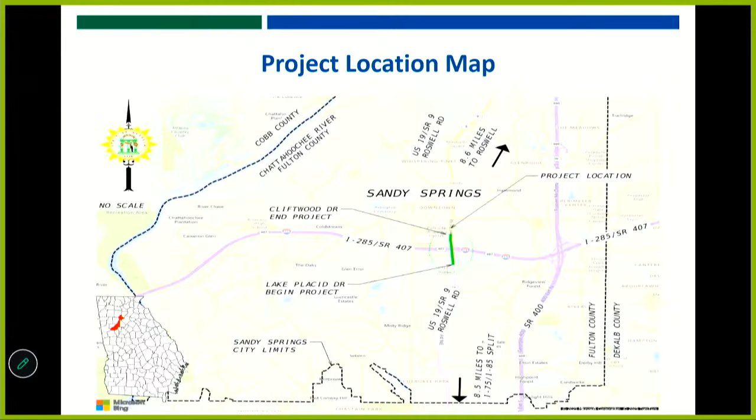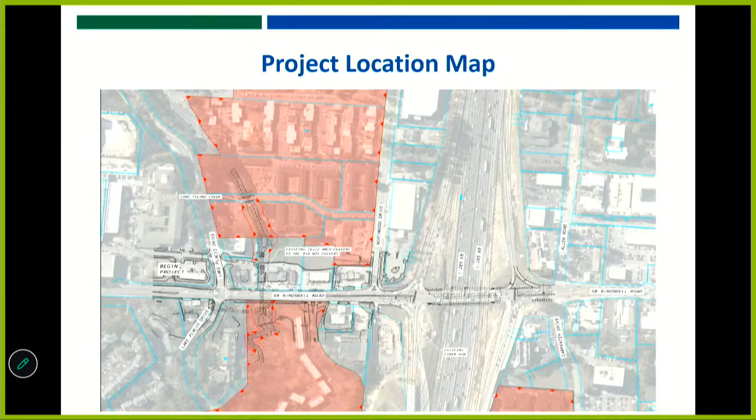First off, we'll go through some existing conditions of Roswell Road and 285 and the surrounding city side streets. Here's a location map, you see it's just west of 400 at 285. A little bit more detail on a location map. The red that you see are previously identified historic districts, environmental resources. Currently, the interchange is a tight urban diamond, or a TUDI.

If you hear me say TUDI, I'm speaking to the existing interchange configuration. 285 in the area has got 10 lanes. There's barrier-separated collector distributors along 285. Roswell Road is 4-lane, it's median divided, it's a principal arterial, carries approximately 40,000 vehicles a day through the interchange. Lane widths on Roswell Road currently vary from 10 to 11 feet. The border width or shoulder varies from 10 to 16 feet and includes 4 to approximately 9-foot sidewalks, side paths.

285 through here has a variable speed limit. The 65 miles per hour is used for the design of the initial ramp curve. I have it right here. The Roswell Road speed limit is 35 miles per hour. Existing right-of-way along Roswell Road varies from about 60 to 220 feet. I do want to point out that that 220 feet is up at 285. That's your widest right-of-way due to 285's right-of-way in the area.

The project is mixed-use residential and commercial. The ramps off of 285 are 2 to 4 lanes currently, 12-foot wide lanes, and the ramp shoulders vary from 8 to 12 feet. Our local roads include, but are not limited to, Lake Placid Drive, Northwoods Drive, Allen Road, Carpenter Drive, and Cliffwood Drive. All of these city streets within the limits range from 2 to 4 travel lanes with widths varying from 10 to 11 feet. They all maintain a variable border width, 10 to 16 feet, and the sidewalks and shoulders range from 4 to 10 feet in width.

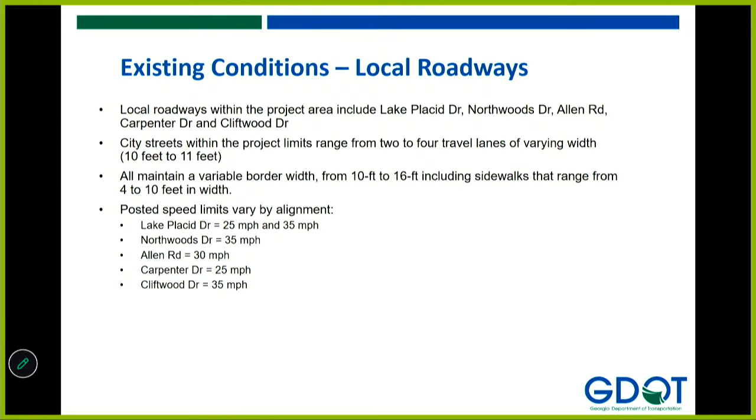You can see that our posted speed limits vary depending on which side street you're on. We have a lot of previously identified historic resources, and we saw that on my location map with the red boxes indicating history. We have at least one stream in the area. Allen Park is located nearby, it is not within the project limit, but it is close.

There will be ongoing coordination with the 285 express lanes for noise mitigation. I don't want to keep going, y'all can't see it, let's see. And there's still ecological resource surveys that need to be completed for this particular project.

Now the fun part, the alternatives we've considered. Our first alternative, alternative one, was a displaced left. It was not chosen as the preferred alternative in part due to benefit cost, and it not fitting with what you see in the blue there, which is a footprint that Gresham was provided for the future express lanes. Our displaced left just was not going to size to fit vertically nor horizontally with those Top End express lanes. So that was a parameter that we had to take into account on every alternative that we explored.

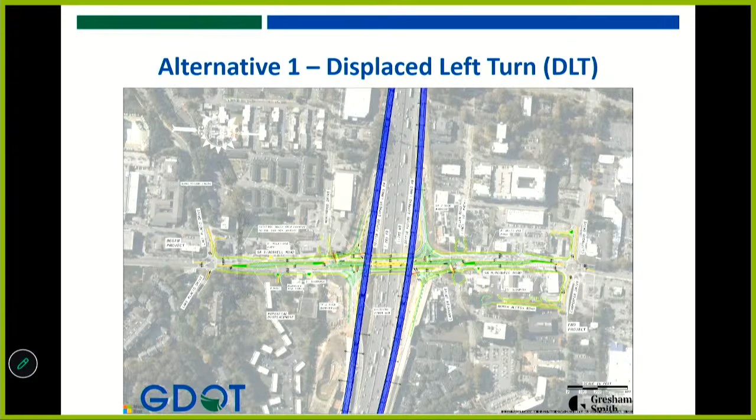The next alternative, alternative 2, when it pops back up, is a single point, or a SPUI. Same reasons alternative 1 wasn't chosen: very low benefit cost and does not fit well or at all in this case with our Top End express lane parameter.

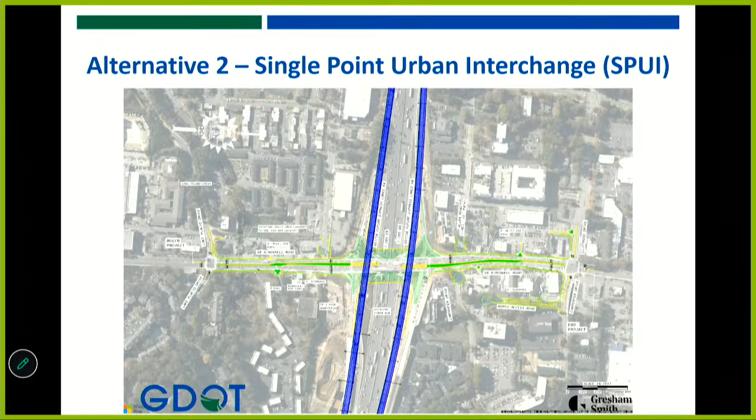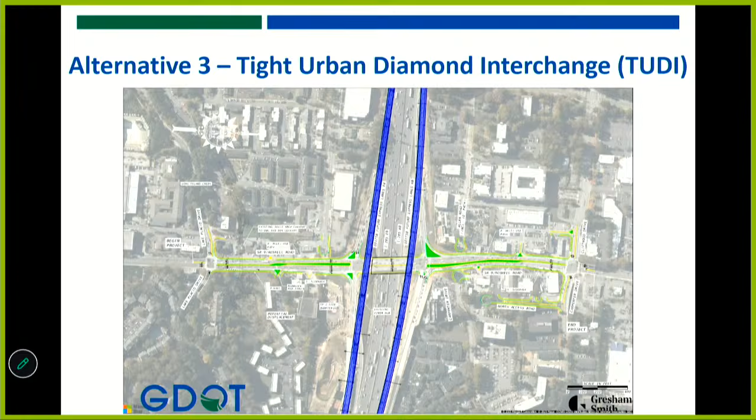Alternative 3 was taking the existing TUDI or tight urban diamond and adding capacity in the form of left turn lanes onto and off of the ramps, increasing level of service and operations with the existing configuration. The bridge would be replaced in this instance. This also wasn't chosen due to a lower benefit cost ratio. It does fit within the current footprint we were provided for the express lanes, but with a lower benefit cost, it was not the preferred alternative in this study.

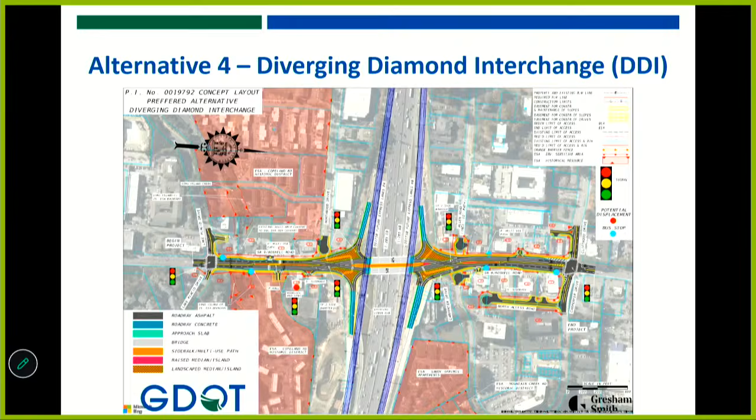Alternative 4, which is our preferred alternative, is a DDI, or diverging diamond interchange. This provided the highest benefit cost and fit well within the express lane footprint. Here's our preferred alternative. Go to the next one.

Total project cost for the preferred alternative, the DDI, is estimated anywhere from $70 to $85 million. As mentioned in the beginning, the only thing funded here is the scoping phase—right-of-way, utility, construction, and PE, or preliminary engineering, are not currently funded.

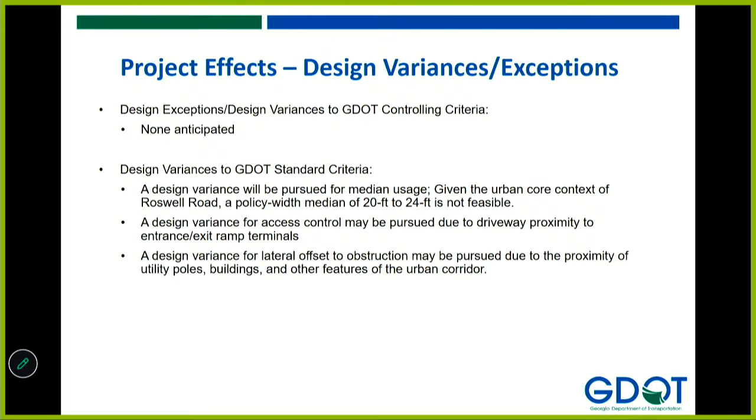We have potential effects and other highlights we'd like to point out. We are not anticipating any controlling criteria exceptions or variances. We are anticipating at least 3 variances to GDOT standard criteria at this time: median usage, since we won't be able to fit a 20 to 24 foot wide median as policy calls for through here; access control, which may need a variance due to proximity of driveways to our ramps; and a design variance for lateral offset to obstruction, which may need to be pursued due to the proximity of poles, buildings, and other features inherent to an urban corridor.

There are currently 23 anticipated parcels. There's one potential displacement—there's a gas station on the south side of 285 where the existing sidewalk is almost up against the filler caps, and any widening there is most likely going to cause displacement.

Our required right-of-way, as mentioned before, is really variable, from 60 up to 220 feet by the interstate. Proposed, we are going to go from 60 to 75 feet at our minimum and up to 260 feet at the interchange. With this corridor already being very built out and commercialized, right-of-way is a challenge through here.

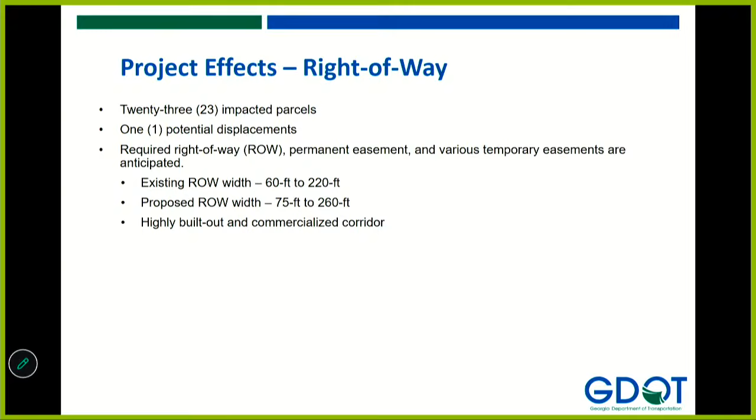There are several utilities, as I'm sure a lot of people in this room know, running through the corridor, both underground and aerial. The utility adjustment schedule for this project will be complex and will require very close coordination with utility owners and the contractor. This is a major project, so a public interest determination policy and procedure is going to be recommended.

This is just a graphic depicting all of the utilities in the corridor. You see electric, traffic control, gas, water, sewer, and some ITS running through there—typical utilities in a very built-out urban corridor. This is the north side; there are several attached to the bridge.

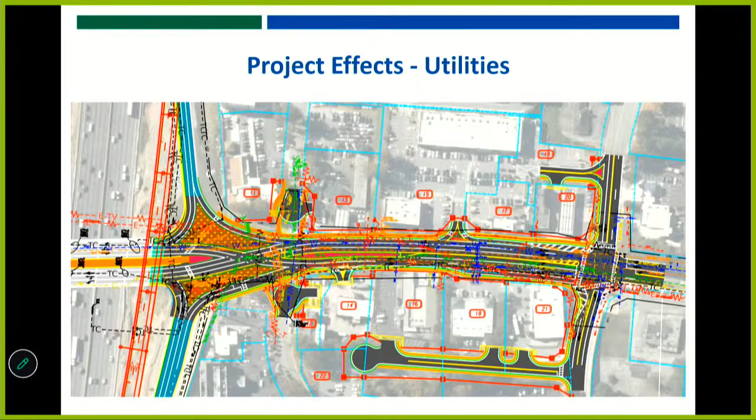More project effects: as everyone knows, there's a lot of congestion that exists here. During construction staging, there will be some growing pains. The staging will be complex, with a lot of traffic shifts and lane closures. There will need to be close coordination with MARTA due to the bus stops located in the corridor and project limits. As mentioned before, the utility adjustment schedule will be complex and long, and there are several nearby projects requiring close coordination.

The road user cost here is pretty high per day, so it's possible that early completion incentives will be provided. In this area, the municipal separate storm sewer system, or MS4, policy applies, but given the corridor characteristics, exclusions may be pursued since MS4 BMPs would be infeasible if proposed.

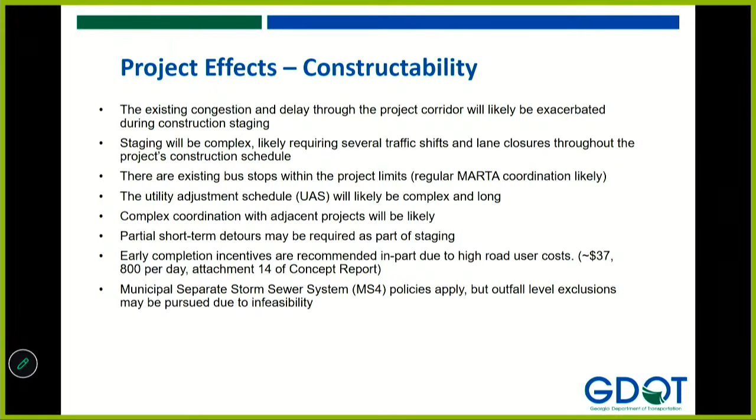And that is the end of our presentation, and I welcome any questions.

Thank you. Yes, sir. Let's start with questions—who's interested? Ms. Mueller.

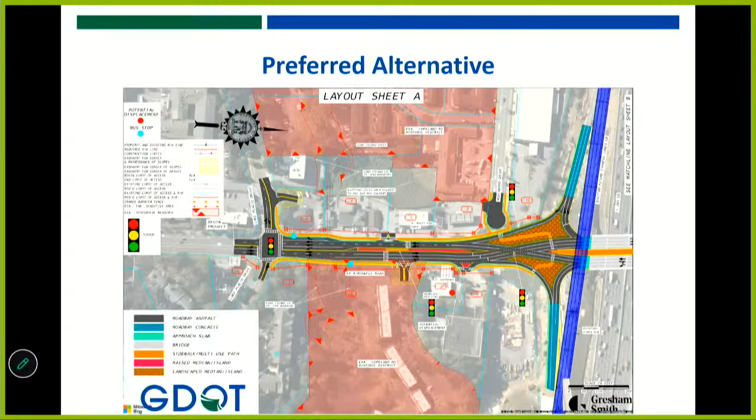And on Lake Placid, you've got a cut in the curb—one going north, one going south. Is there any way to connect a roadway to those cuts in the curb to feed these businesses on Northwoods that you're basically putting out of business?

So if I understand correctly, you're asking if there's a possibility for an access road from Lake Placid to Northwoods. That was looked at early on, actually sketched up, and taken out due to that giant hole behind those businesses. Those businesses are all held up with, I think, a gabion wall—hard to see with all the kudzu on it the last time I was out there. I'm not going to tell you it's impossible. It would be very expensive, but it's doable. We sketched it out, fleshed it out.

We discussed that probably back last summer and decided to remove it from the south side due to the constructability and cost associated with it. Not to mention it would impact more of those large transmission poles running down Roswell Road. So it is possible, but it was removed due to cost and constructability.

Okay, well, you mentioned something about filling the hole. We know there's a hole there. We also know that GDOT moves a lot of earth. Is there no way they could come in and fill that hole? Like I said, I'm not telling you it's impossible. I don't want to speak directly for GDOT. Thank you.